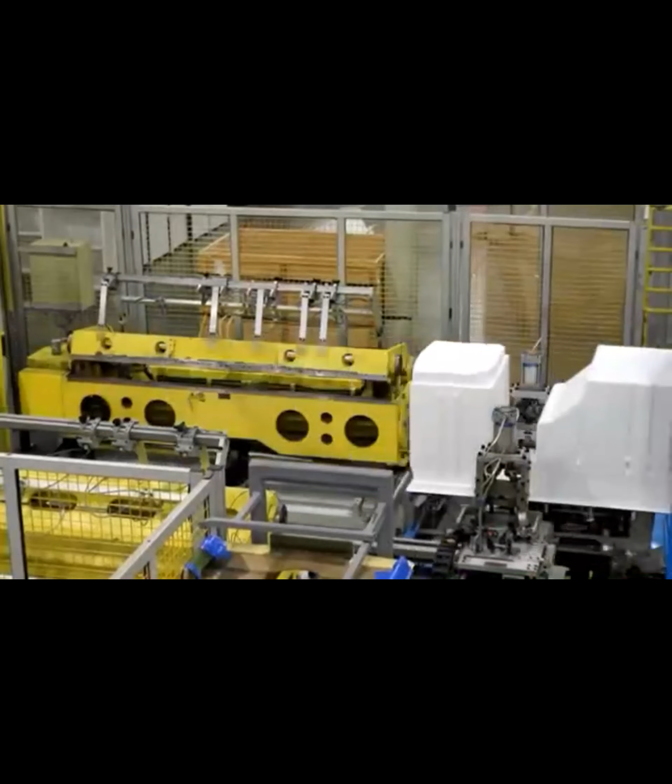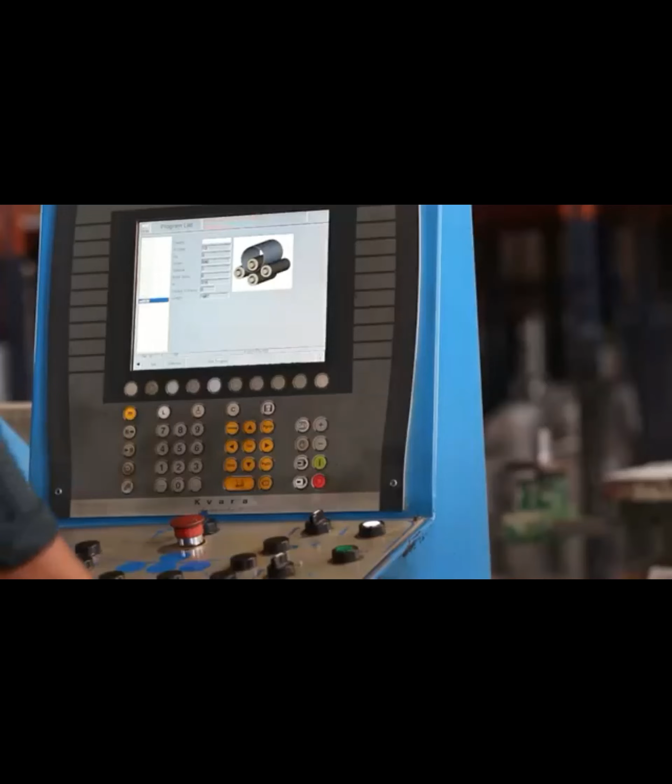ISHRAE disseminates knowledge through its technical committees, which consists of some of the best minds of our industry. It publishes technical books, newsletters, and a prestigious journal, distributing the wealth of knowledge to all its members. Working with government departments, ISHRAE helps formalize industry codes and standards. ISHRAE promotes research by offering financial support to student members to carry out groundbreaking work in technology, systems and processes.

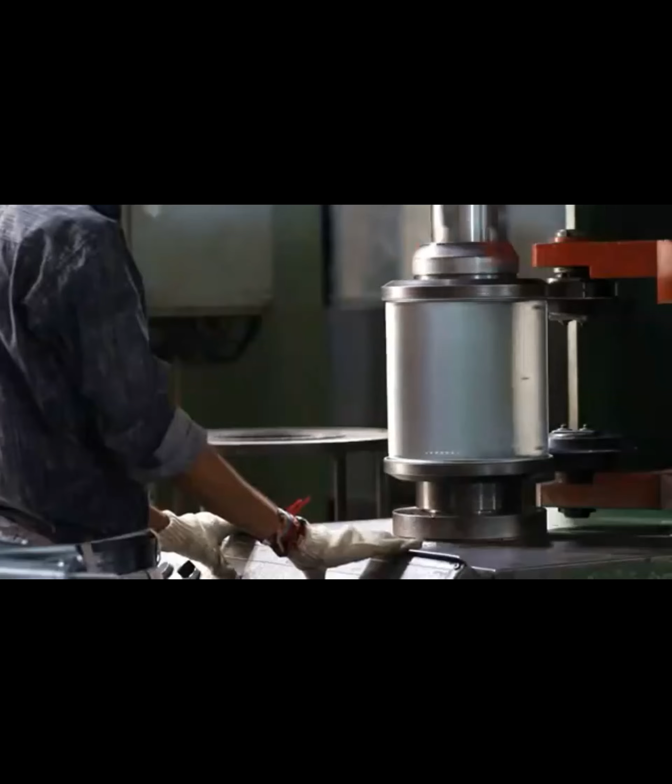Our educational wing, ISHRAE Institute of Excellence, organizes training programs and workshops to help members enhance their skill sets. Our specially designed certification programs under ICP, that is, ISHRAE Certified Professional, empower professionals to always be in step with the prevailing technology. Specially designed courses for technicians are offered to meet the ever-increasing demand for a skilled workforce.

ISHRAE organizes exhibitions, conferences, panel discussions, and product presentations throughout the country. We organize the industry's largest international exposition in South Asia, ACREX India, to showcase cutting-edge technology, innovation, and provide a platform for closer interactions amongst the decision makers in the industry. The ISHRAE exhibition is now growing from an HVAC and R show into BFA, Build Fair Alliance.

This brings together several allied shows connected with the building services industry all at one location. Our chapters organize several other popular events like ISHRAEConf in Delhi, Raycon in Kolkata, Symposia in Mumbai, TechFest in Goa, and many more.

We are committed to provide training and career guidance to our student members through seminars, lectures, quiz contests and site visits. A prestigious quiz competition is organized by ISHRAE to catalyze the transformation of budding engineering professionals.

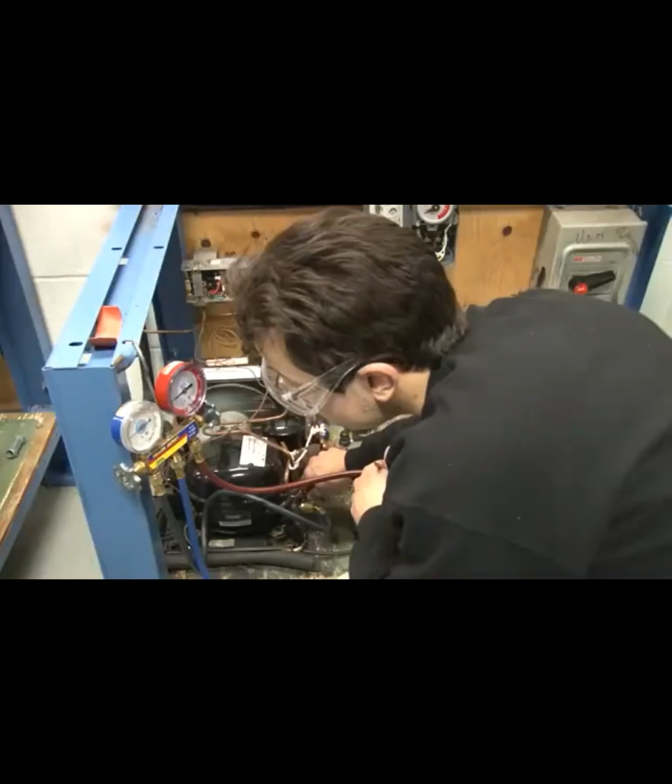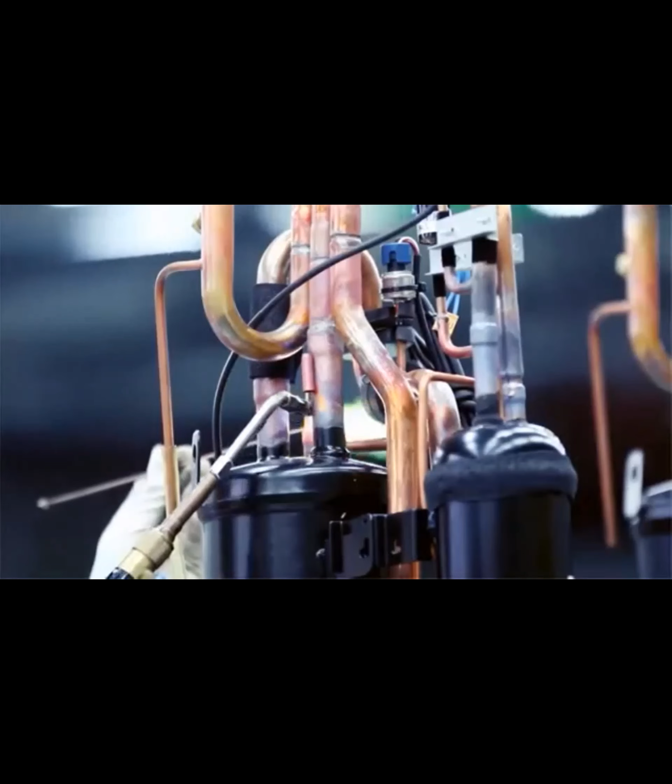ISHRAE provides a platform to potential employers to select student members for careers in the HVAC and R industry at the ISHRAE Job Junction. Young minds are made aware of the need for saving power, clean air and sustainability. The K-12 initiative of ISHRAE focuses attention on school students' development to inculcate a scientific fervor and help develop them into responsible citizens.

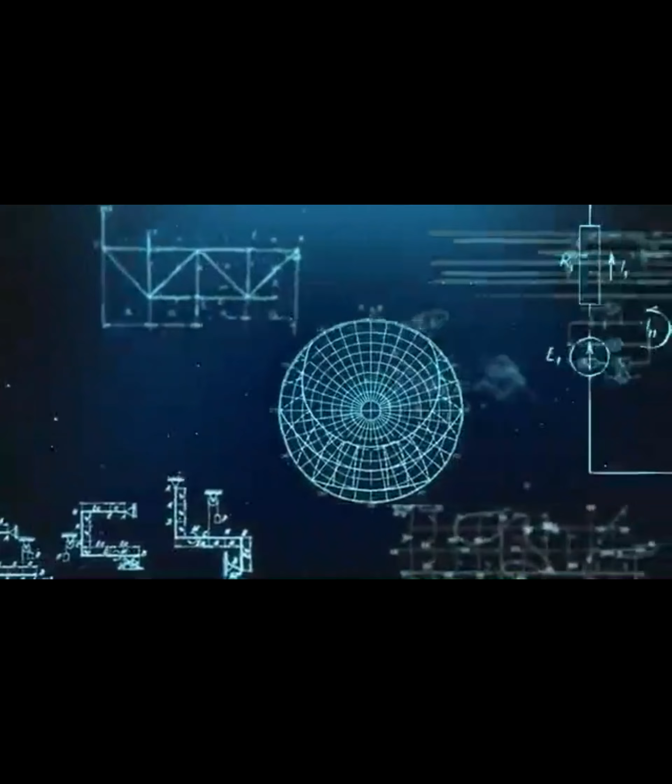Speedy information is imperative to keep moving forward in this hyper-connected digital age. Searcher, a specifically designed search engine, is now available, which allows access to a well-catalogued database on HVACR and building services industry with just a few clicks.

ISHRAE cooperates with various national and international bodies, industry, governments, academia, think tanks to promote the concept of sustainability, environmental protection and energy efficiency and conservation, to enter and explore the universe of the Indian HVACR industry.

Log on to ISHRAE.in that unfolds a panorama of information. Let us engineer a sustainable future together through ISHRAE.

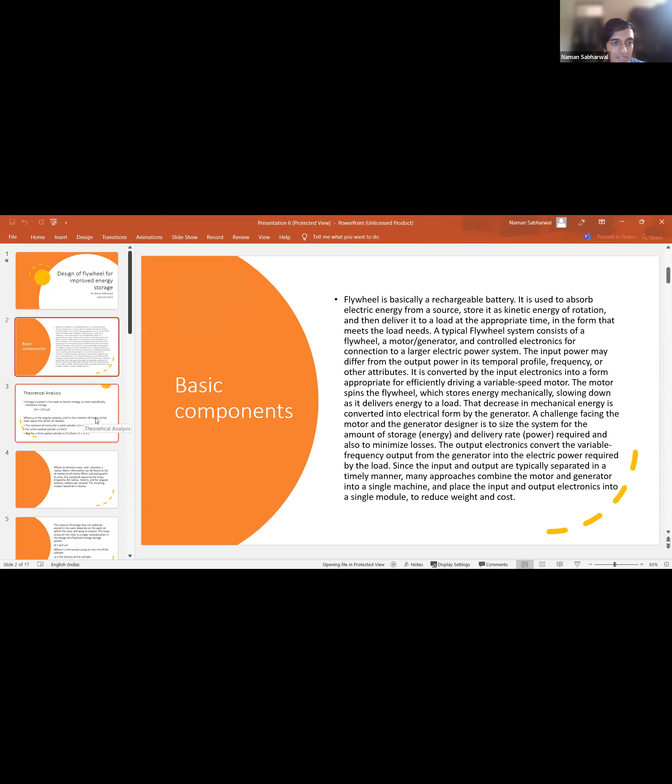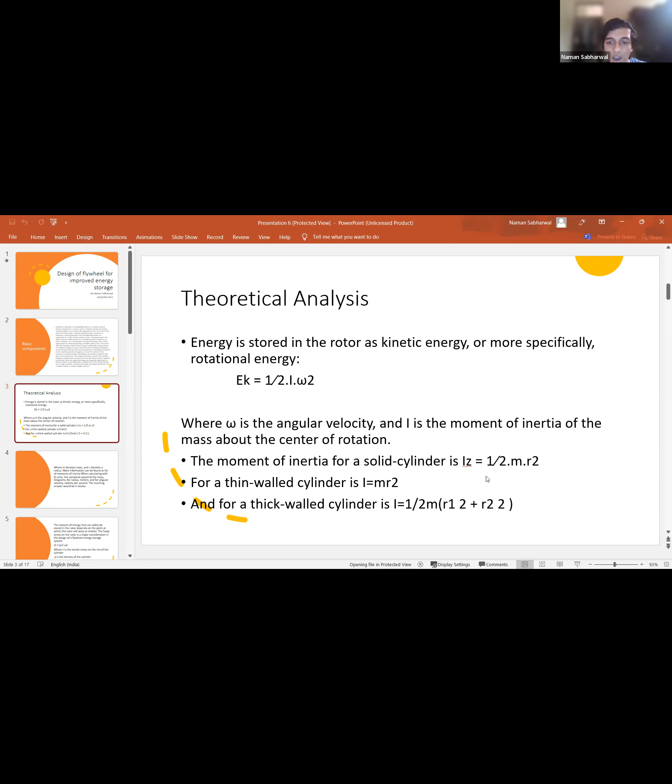So I'll just go to the next slide. This is the theoretical analysis. Basically half I omega square, the energy is stored in the rotor as kinetic energy as half I omega square. So the moment of inertia of a solid cylinder will be half mr square. For a thin walled cylinder it will be mr square. For a thick walled cylinder it will be half m(r1 square plus r2 square). So these are the notations, we don't need to know the notations.

It's very easy. So the amount of energy that can be safely stored in the rotor depends on the point at which the rotor will warp or shatter. The hoop stress on the rotor is a major consideration in the design of a flywheel energy storage system. So sigma T is equal to rho r square omega square, where T is the tensile strength on the rim of the cylinder, rho is the density of the cylinder, r is radius, and omega is the angular velocity of the cylinder.

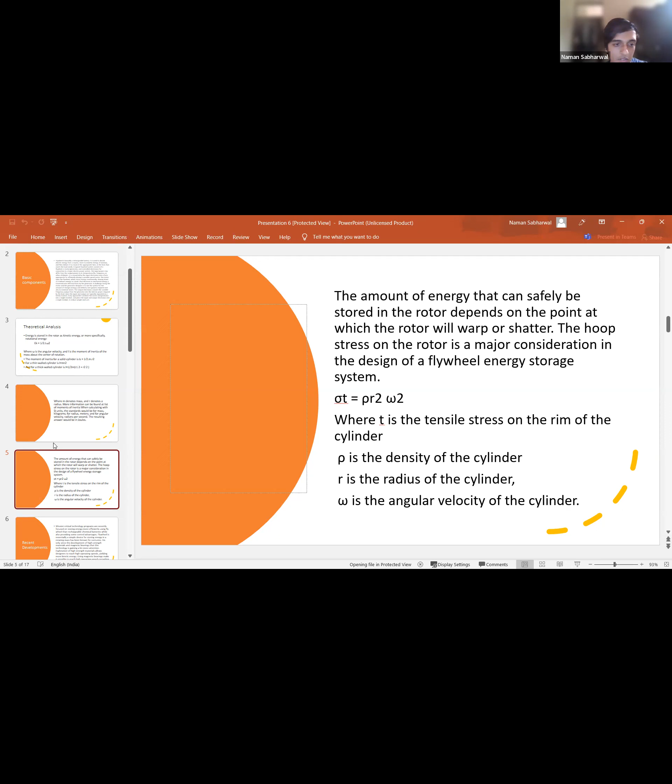So, recent developments: mission critical technology programs are recently focused on storing energy in a more efficient way using flywheels than rechargeable chemical batteries, while also providing some control advantages. The flywheel is essentially a simple device for storing energy in a rotating mass, and has been known for centuries. It's only since the development of high strength materials and magnetic bearings that this technology is gaining a lot more attention.

Exploration of high-strength materials allows designers to reach high operating speeds, yielding more kinetic energy. Using magnetic bearings makes it possible to reach high operating speeds, providing cleaner, faster, and more efficient bearing equipment at extreme temperatures.

Recently designed flywheels could offer orders of magnitude increases in both performance and service life, and in addition, large controlled torques and momentum storage capability for spacecraft, launch vehicles, aircraft power systems, and power supplies. The flywheel system mainly consists of flywheel rotor, motor, generator, magnetic bearings, housing, and power transformation electronic system.

In the development of flywheel, current researchers have focused on increasing the performance while meeting safety considerations, that is, material, housing, and bearing failures. Investigation of energy storage and failure considerations starts with calculation of kinetic energy.

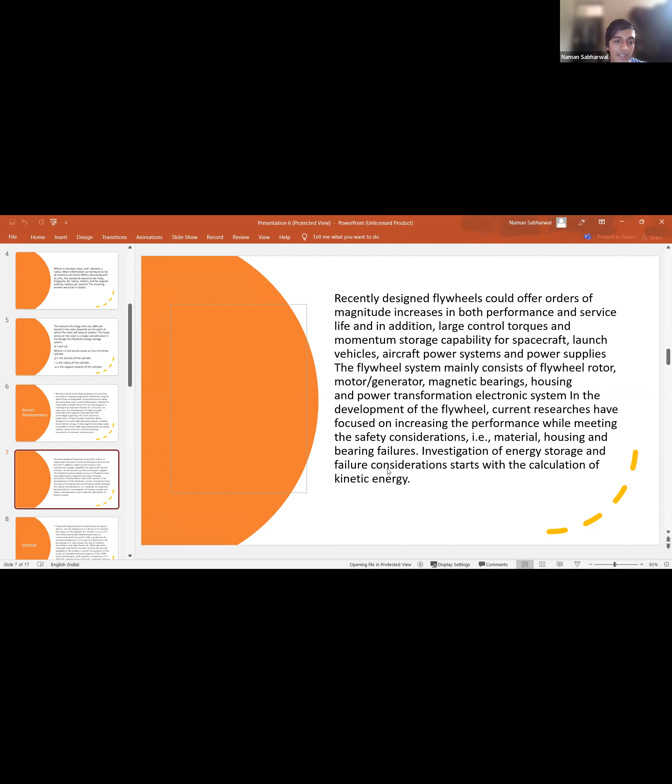So the newly proposed design is as follows. Proposed fully parametric model shown in figure, where t is the thickness, 5.08 centimeters, and the radius of the flywheel is about 14.605 centimeters. Two-dimensional flywheel geometry is constructed with a total of 10 x-coordinates by varying coordinates 1 to 8, only in the A direction, to be less than or equal to H. The T-axis shows the axis of rotation according to the right-hand rule.

Although many materials with better strength and lower density are available in the market to serve the purpose of the study, an example material property of AISI 1006 steel, cold drawn, with modulus of elasticity of 205 gigapascals, density of 7.872 grams per centimeter cube, Poisson ratio of 0.29, and yield stress of 290 megapascals is adopted in all cases.

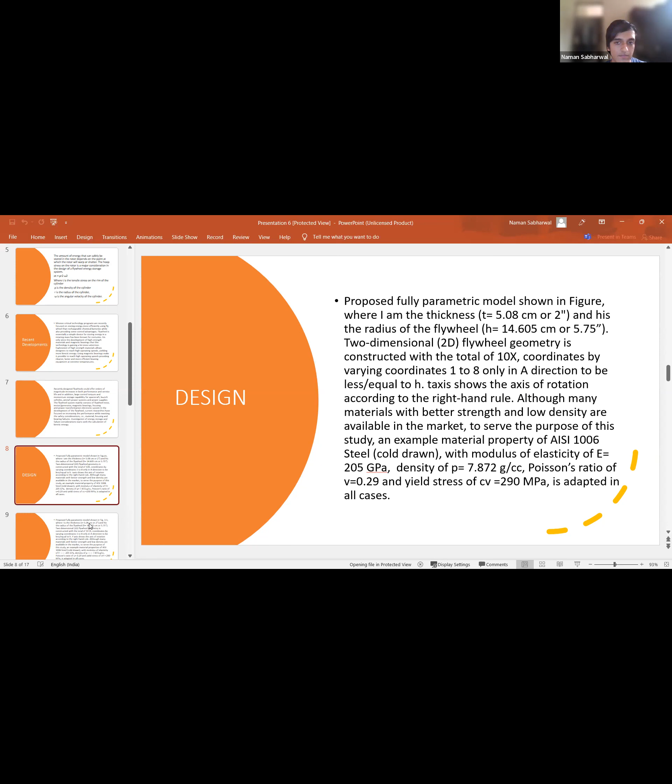This is the model which had been described here. Although there is an infinite number of possibilities for 2D cross-section selection...

The procedure outlined in the previous section was applied to the first solid disk as the base 2D geometry. Next, the annular disk geometry is chosen with an inner radius of 0.1016 meters. In the test runs, using various inner diameter sizes performed worst in terms of high stress levels, even at lower rotational speeds. Therefore, only a single configuration is documented here.

Third and fourth cross sections are chosen out of concave and triangular shaped functions respectively. Final cross section is selected to be a composition of convex lines.

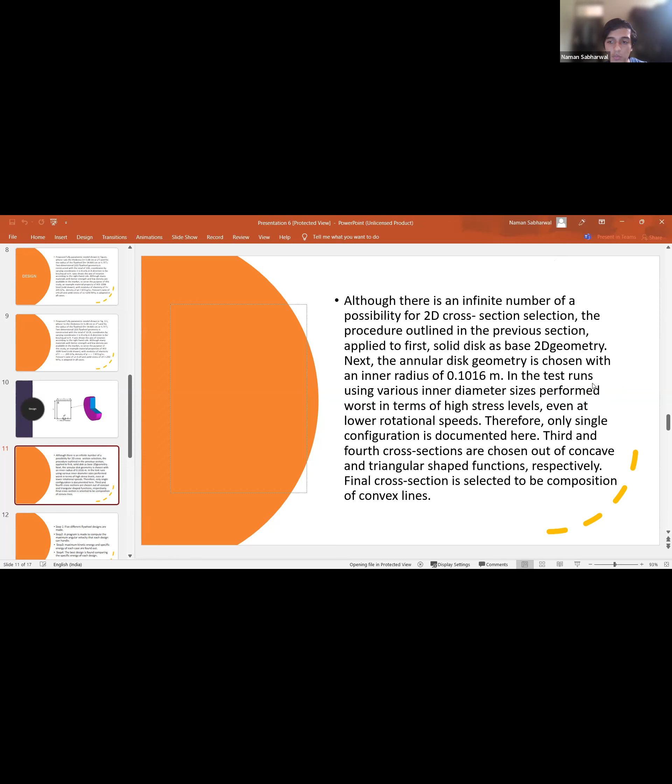So the whole testing process is divided into 4 steps. 5 different flywheel designs are made. A program is made to compute the maximum angular velocity that each design can handle. Step 3, maximum kinetic energy and specific energy of each case are found out. The best design is found by comparing the specific energy of each design. So the design which has the most specific energy is our most efficient design.

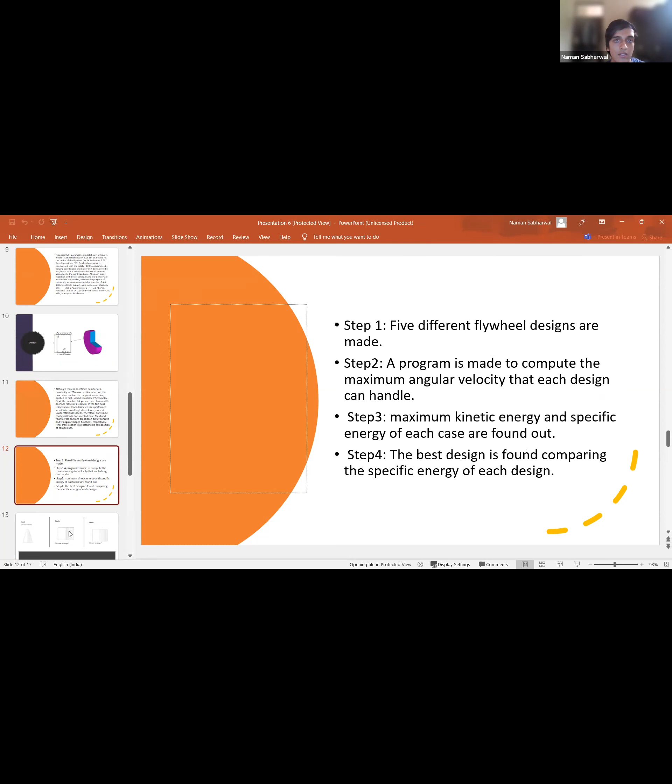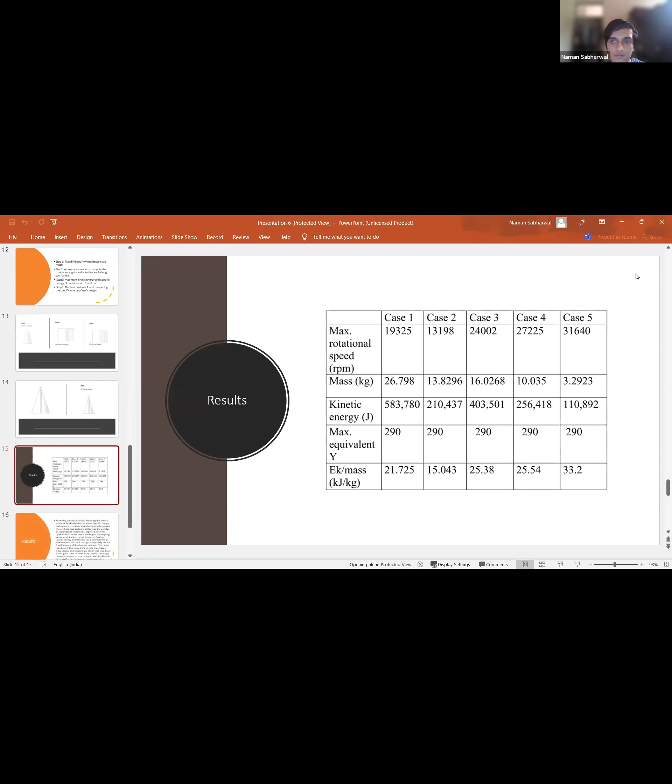Naman, just recalling you, you have only 1 minute left. Yes sir, I'm just finishing.

Last 2 slides. Examining the results shows that using the annular solid disk flywheel yields the lowest specific energy performance no matter what the inner hole radius is chosen. Solid disk performs better than the annular disk, but the highest shaft load is expected since the flywheel mass in this case is the largest.

By adopting simple modifications to geometry, flywheel specific energy performance could be improved as demonstrated in case 3 through 5. Especially in case 5, performance of the flywheel is 50% better than case 1. One more thing to note is that case 5 cross-section also exerts fewer shaft loads than cases 1 through 4, since its mass is the smallest. Although this improvement may be thought small, it could still be crucial for mission critical operations which require long-lasting service life and efficiency.

That's it, sir, I conclude here. Thank you, Naman.

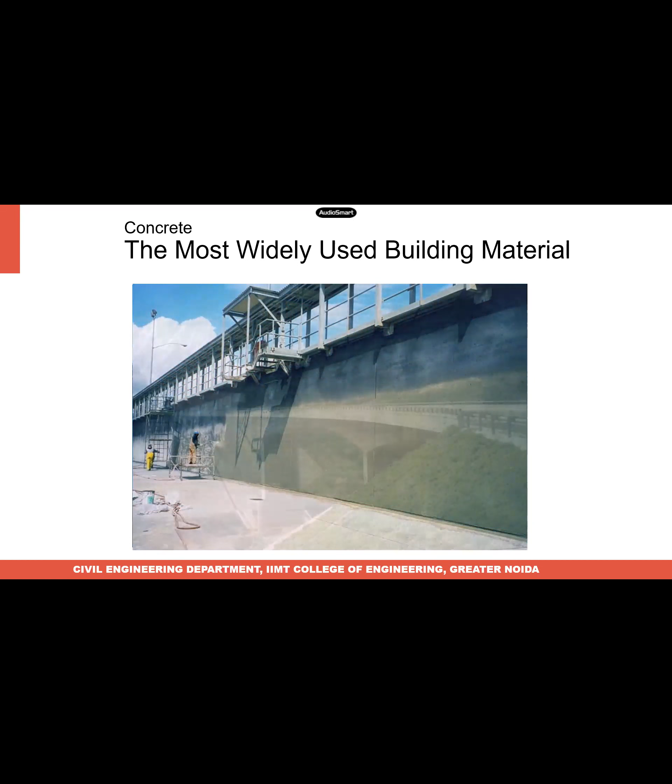Good afternoon, everyone. The subject of my presentation today is concrete durability and its environmental impact. I have four objectives in my presentation. Number one, we will briefly touch upon the overview of porosity and permeability, which impacts concrete durability. We will also see what measures we can take to enhance concrete durability, some performance benchmarks, and the environmental impact of concrete durability. Now, in civil engineering, we all know that concrete is the most widely used material, whether it is water treatment plants, bridges, dams or highways. Nowadays, concrete is most widely used in almost all structures coming around us. Concrete from the outside, although it looks very rock solid and strong, but internally...

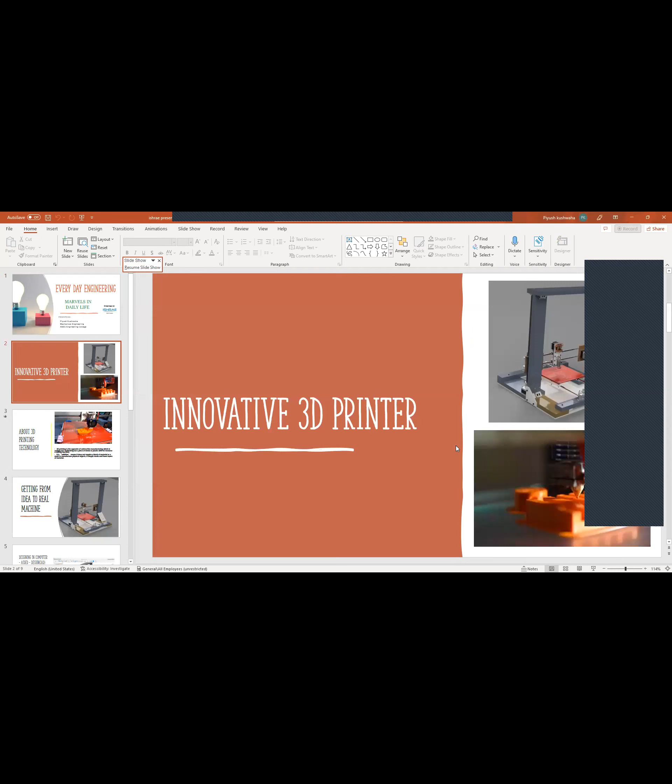Yes, sir. Good morning, all of you. I am Piyush Kushwaha from ABES Engineering College, mechanical department. I am a member of ISHRAE Delhi chapter. My project is about a 3D printer. I made a 3D printer.

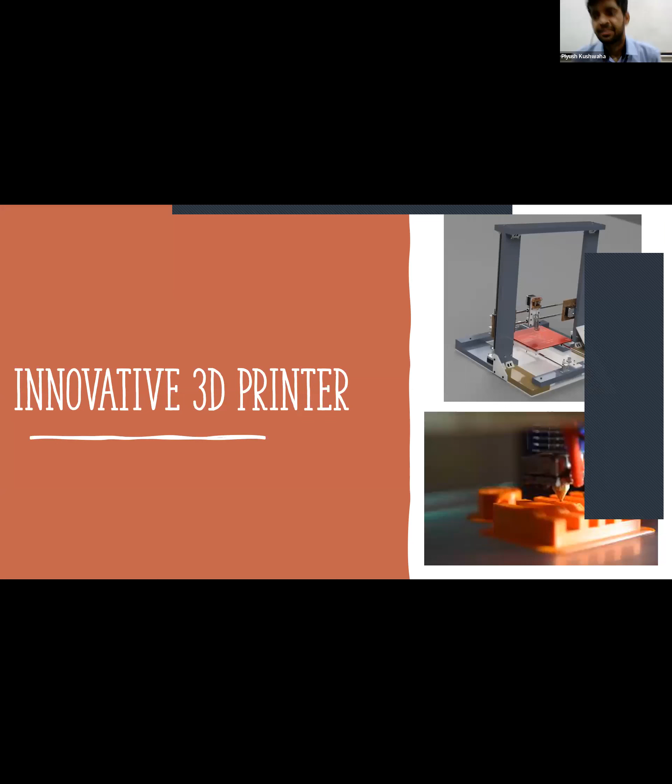A 3D printer is basically a machine that, unlike subtractive manufacturing, builds a part directly rather than starting bigger and machining it down, which requires more material and energy to recycle. 3D printing can be done in plastic or metal, and sometimes ceramics also.

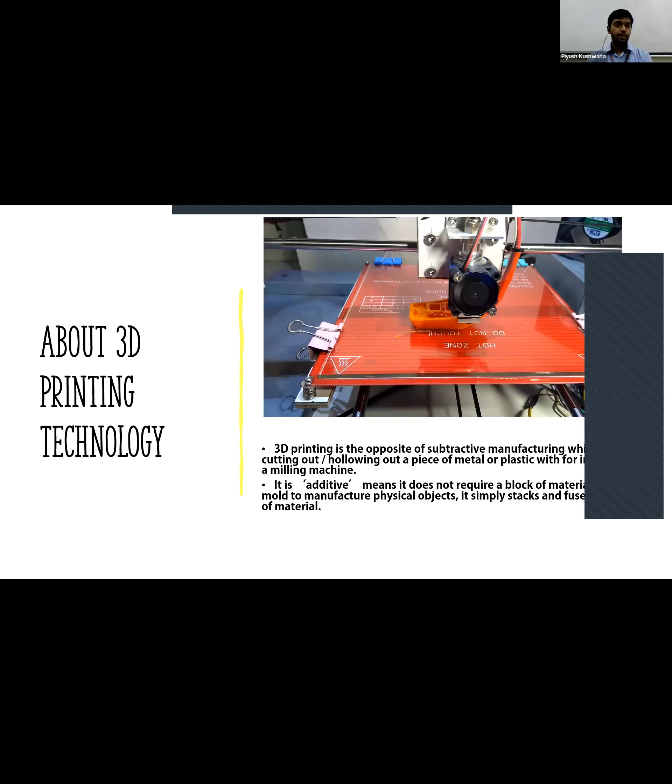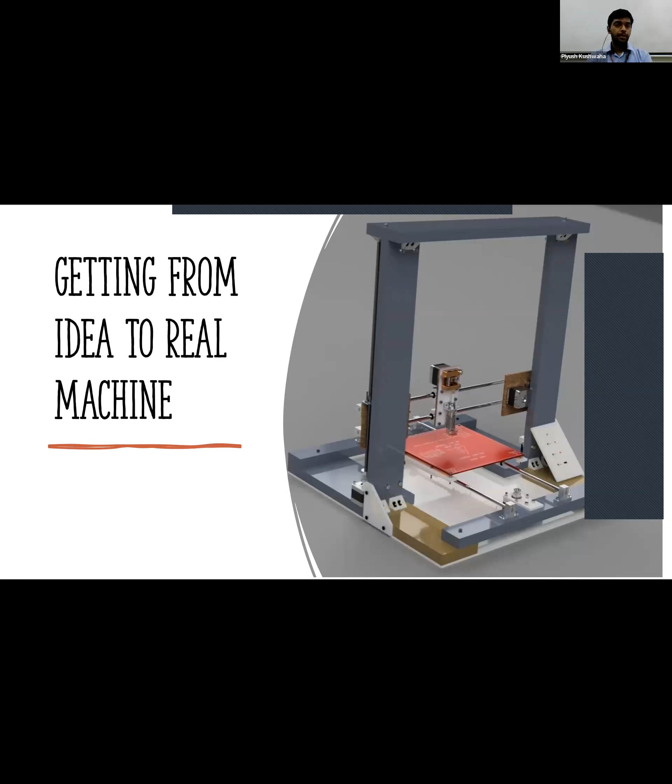So it's additive manufacturing. Here's my journey from idea to my real 3D printing machine. First I started with prototypes, building basically the X and Z axis, then built the whole frame upon that. CAD software helped a lot with analysis and manufacturing, and it improved the accuracy of the process - it's a very nice thing.

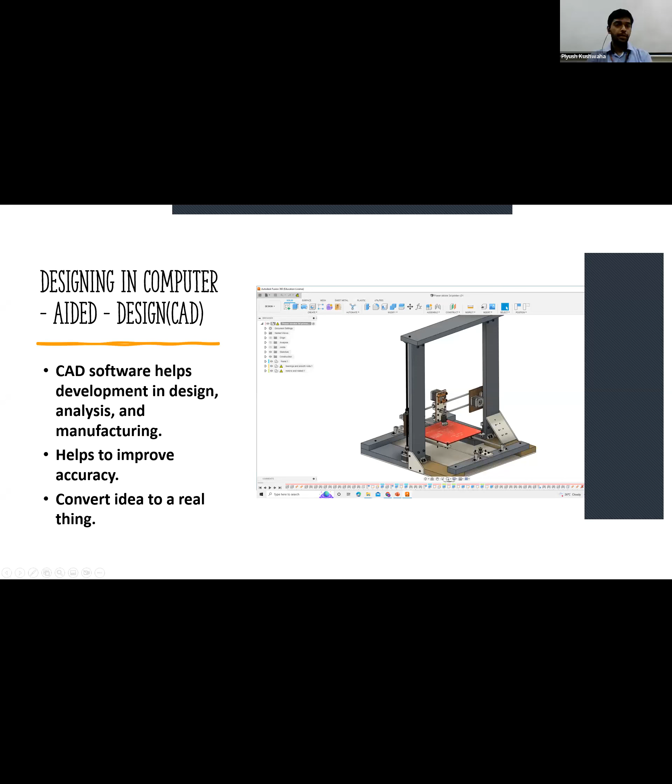It has a huge community, so if we have any problem, somebody in the world from any corner can help us.

After my machine was built, you can see the hot end has a high temperature, around 300 degrees Celsius, 200 degrees Celsius, and it melts the material over time. All these things create a 3D object. No, it's PLA.

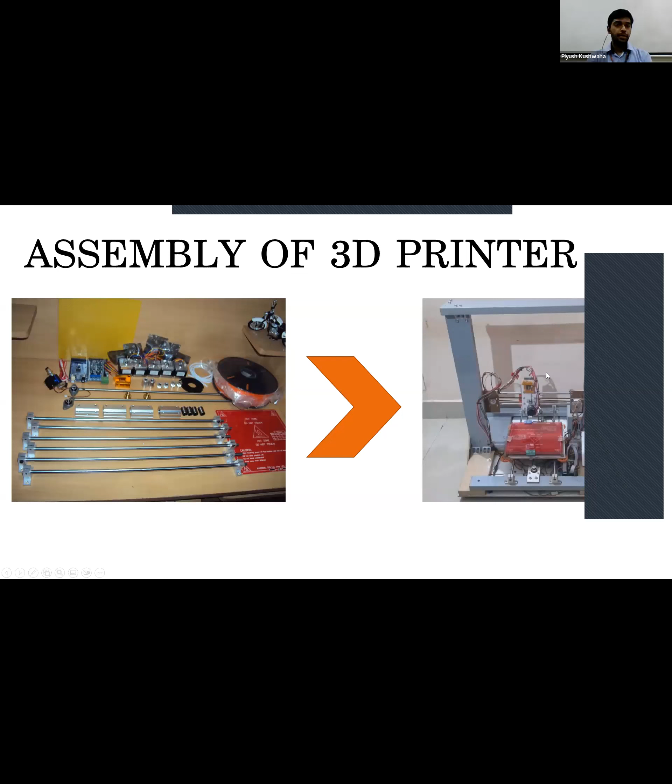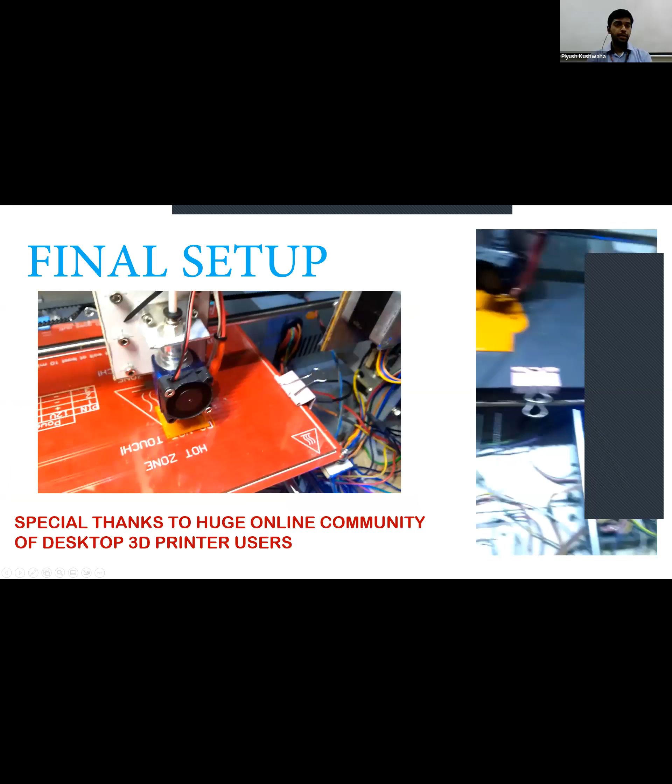Engineering materials are like CF, nylon, a huge variety of filaments. I again thank the huge online community of desktop 3D printing, it helped me a lot.

Now coming to why I like this, 3D printing can turn manufacturing to local, it doesn't have to be far, and it can create very complex shapes also, internal shapes which we can't otherwise achieve.

And 3D printing can make hands. Prosthetic hands are very expensive, and one can't buy those expensive things otherwise.

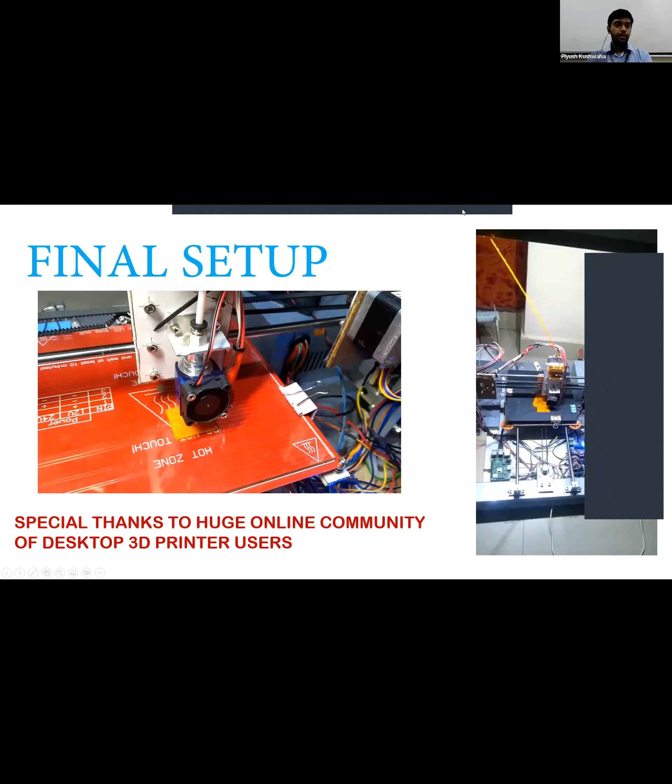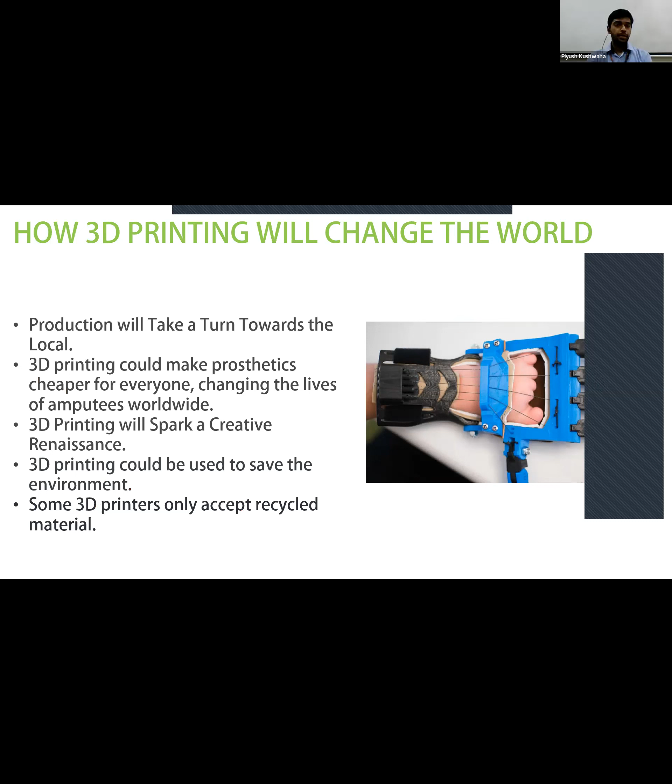3D printing could save the environment, as we see in CNC we create a lot of waste. We accept recycled material, and mainly filament plastics.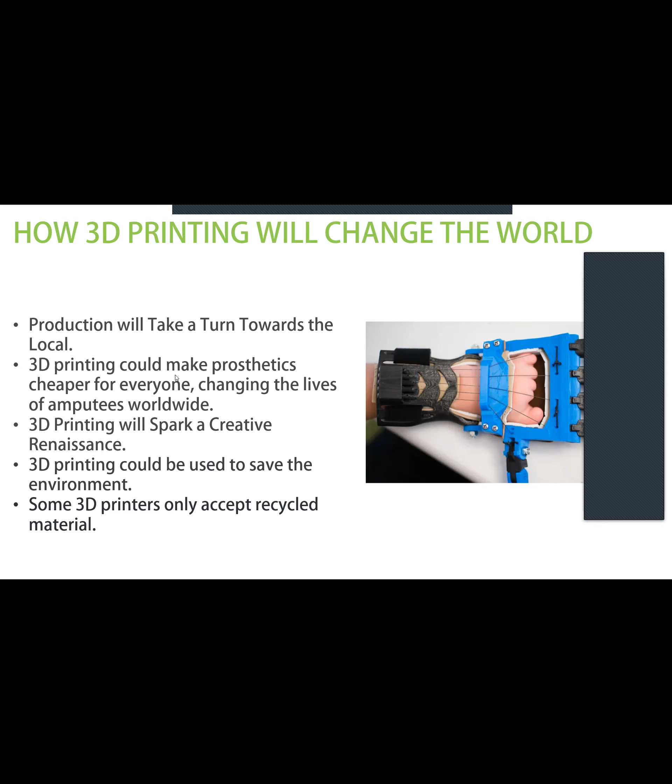The heat exchanger has complex internal shapes, a high fluid pathway and 3D surface features, resulting in high thermal exchange, low weight, and low pressure drop.

We see this in GE Aviation, which has a 3D printed nozzle for a fuel injector, and its weight was reduced by 25%. It's a very huge achievement for me, for us, for the whole world. Thank you, that's all from my side.

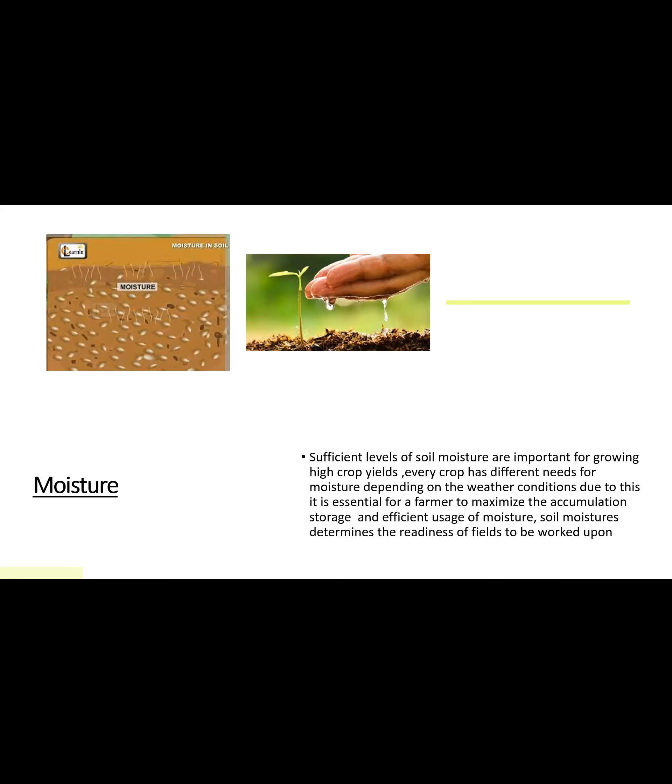In my idea, I use the soil moisture sensor LM393. Arduino works on the principle that all physical activity parameters are converted into signals, like display, buzzers, etc.

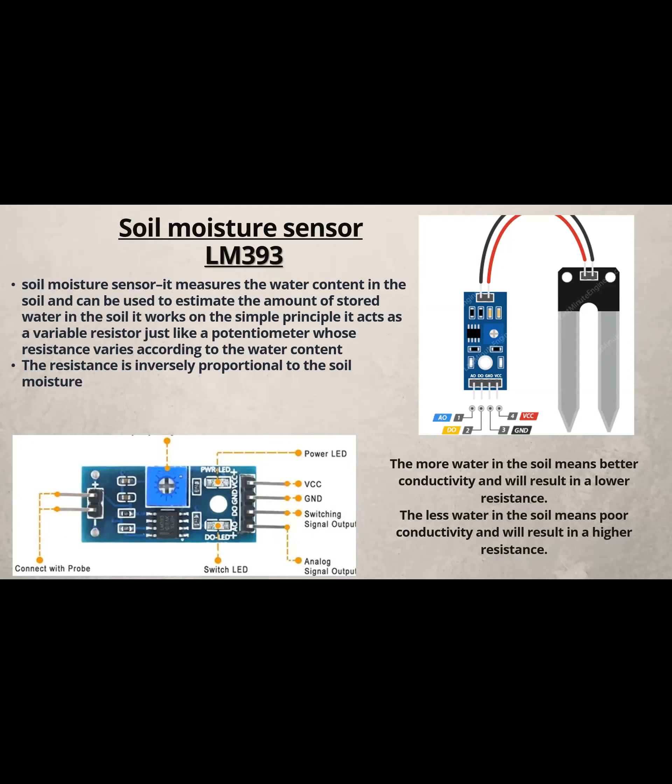This is the probe which is directly inserted into the soil, and this shows the present moisture content available in the soil. This is the LCD for the output signals, which are taken from the Arduino probe sensors.

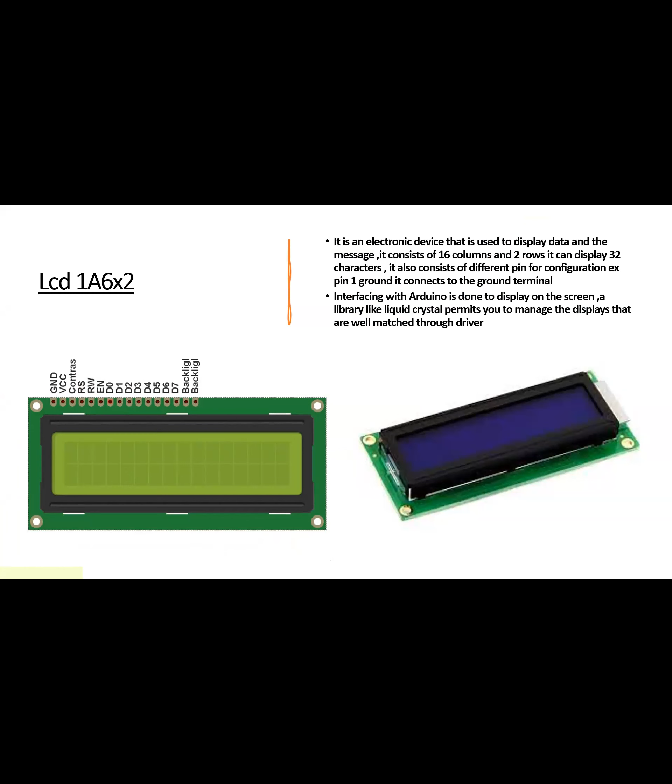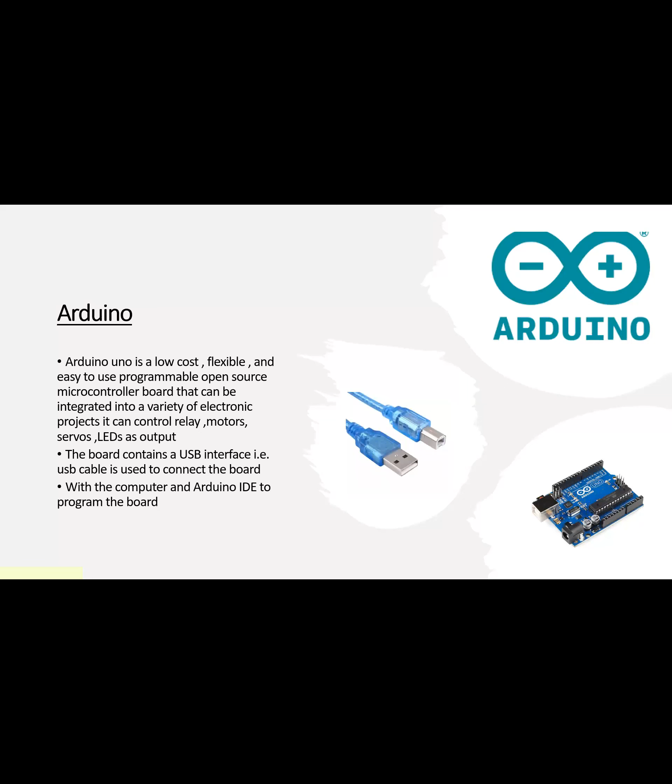Arduino works on the principle of converting all physical activity into digital works, signals, and buzzers through the controlling device of our signals.

This is the circuit diagram of my project. This is the Arduino, LCD, and moisture sensor LM393.

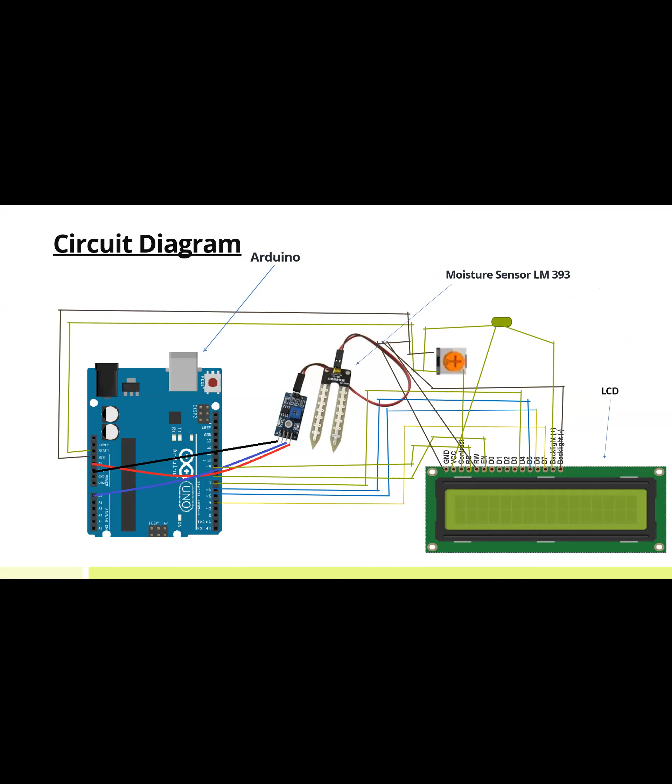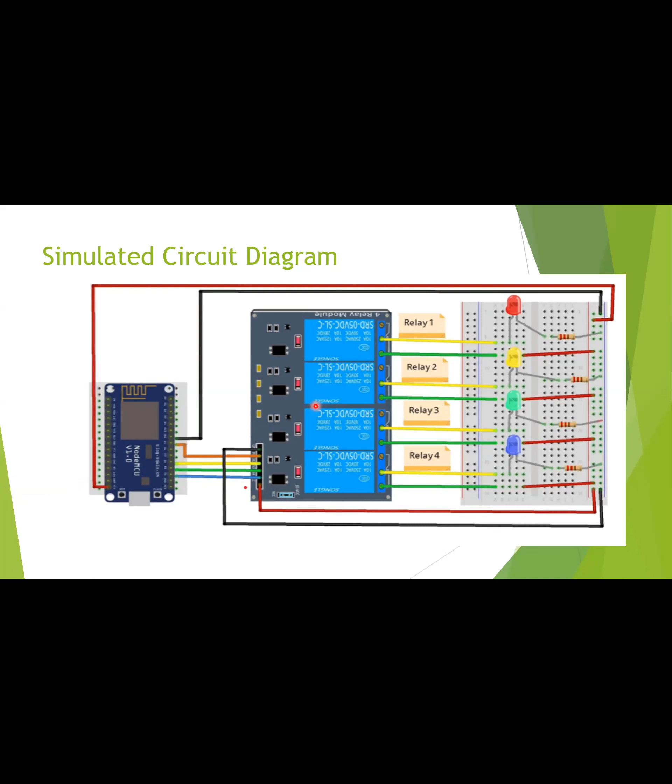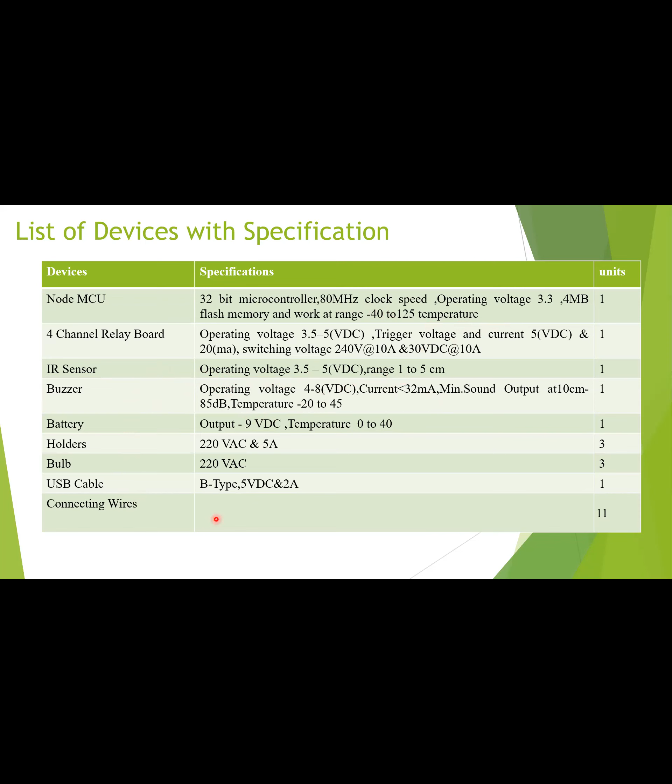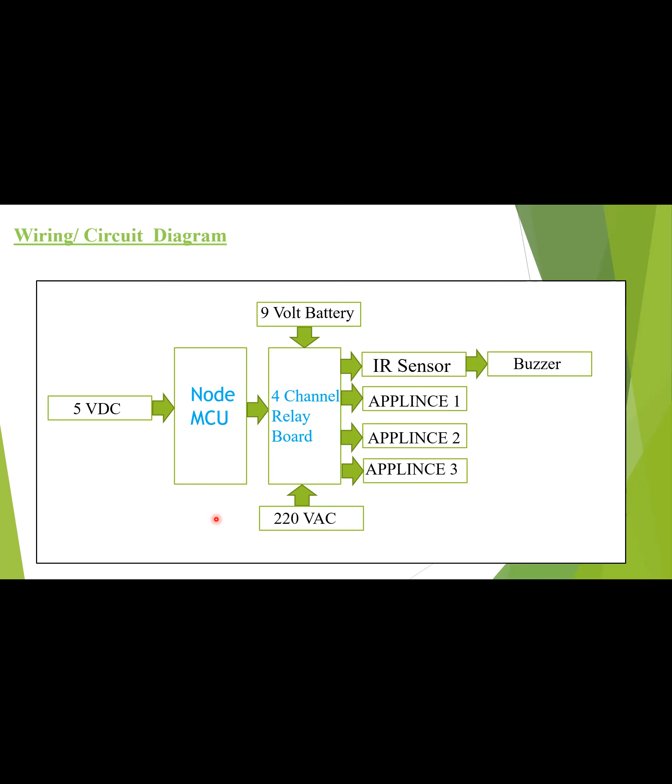This is the code of my project, and this is the circuit diagram again, which shows the flow of power supply from component to component.

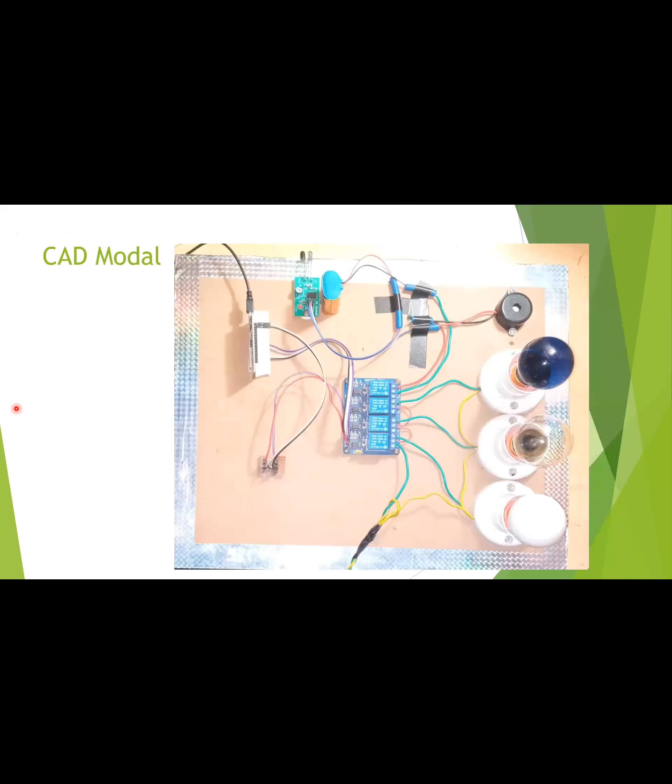This is the CAD model of my project which I made, and now a live demonstration. I am sharing some of the live working of my project, so take a minute.

So basically this is working. The screen appears disconnected. I stopped my presentation and I'm sharing a video instead, from my friend's phone. You may have to switch the account. Can I proceed, sir? Okay, please go ahead.

Okay, thank you sir. So this is basically the working model which I made. But it is not visible. Bring the camera a bit closer. Okay, now it's visible. It's working off this phone's camera now.

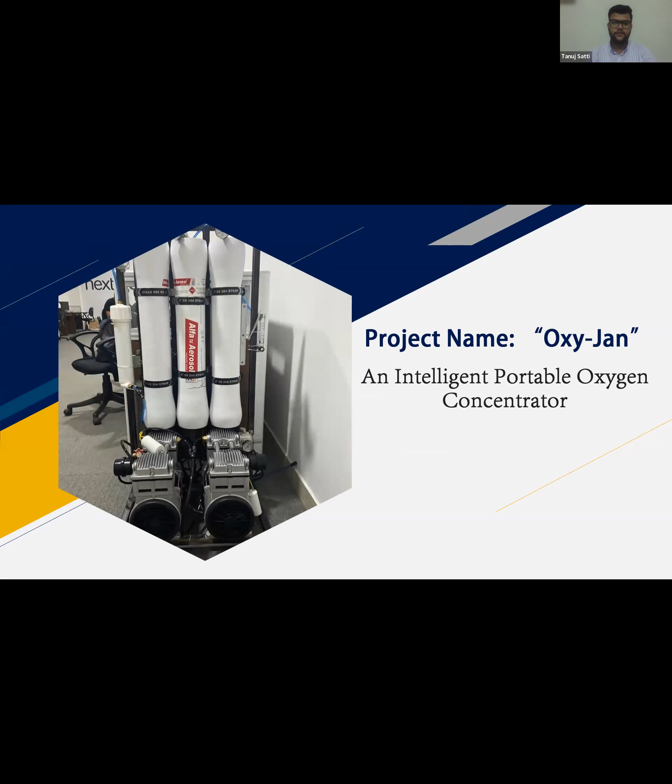So the name of the project that we created in our university is Oxy-Jan. This is the oxygen concentrator that we fabricated in our university itself, and we named it an intelligent portable oxygen concentrator. We made this because we gauged different problem statements.

During the time of the COVID pandemic, we found out that there was a shortage of oxygen concentrators and ventilators. Since oxygen concentrators were only connected to one person at a time, and due to coronavirus infection, if that sort of device got infected, it wasn't used afterwards. Most concentrators also didn't have any feedback loop with their users, and there were lots of external devices for health monitoring software attached to the unit.

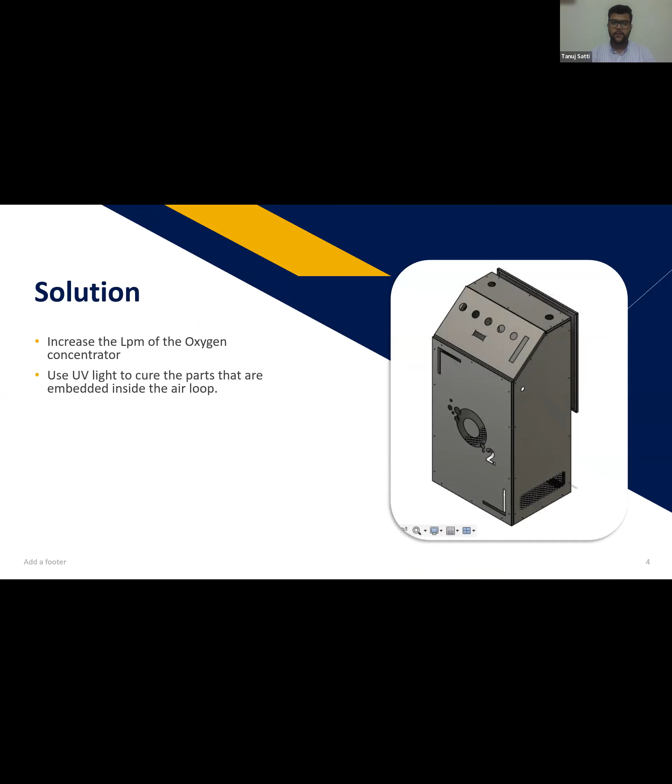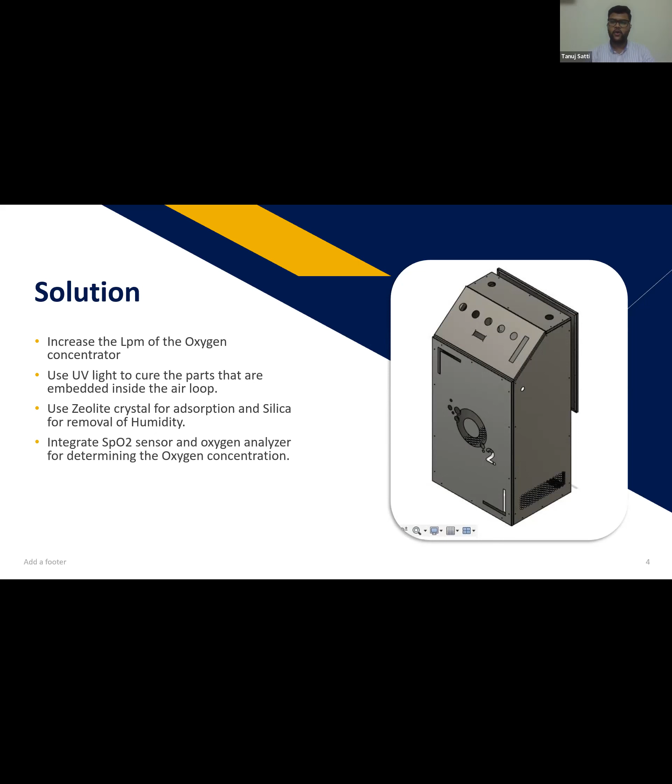So we came up with a solution to increase the liter per minute of the oxygen concentrator, as traditionally concentrators available in the market come with 15 liters per minute; we devised one for 30 liters per minute. We used UV light to cure every part used inside the air loop system, zeolite crystal for adsorption, and silica for removal of humidity, since the oxygen concentrator is based on pressure swing adsorption. We also integrated an SpO2 sensor and oxygen analyzer for determining oxygen concentration, and light indicators for visual information.

As you can see the working of the project now: first, the air gets compressed from these compressors and gets transferred to the cylinders via evaporator. This one cylinder is dedicated for adsorption, this cylinder is also for adsorption, and this cylinder is dedicated for reservoiring or sourcing out the oxygen developed by the two cylinders. This is the dehumidifier container, and this is the FR unit, meaning filter and regulator unit.

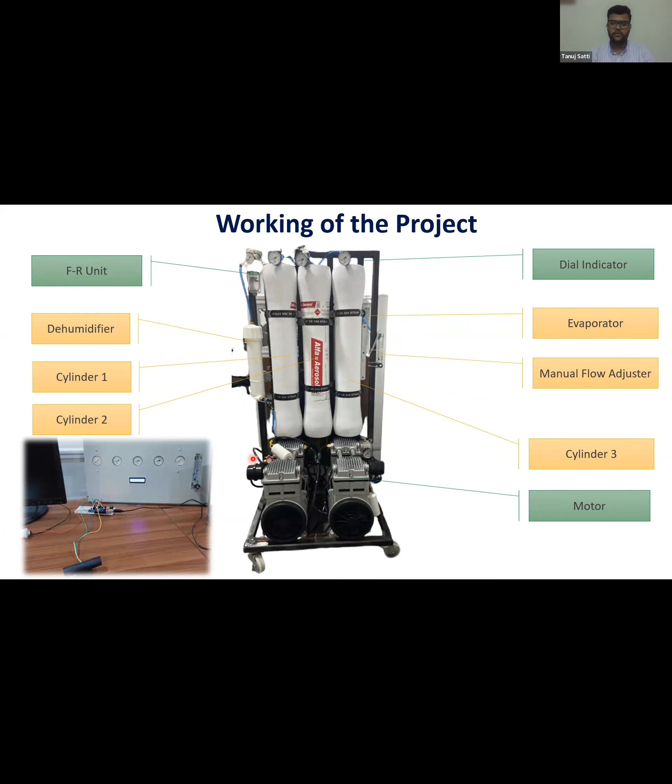Moreover, we have devised an oxygen sensor and a flow rate sensor, which helped us in gauging the flow as well as the concentration of our unit. And this is the video demonstration.

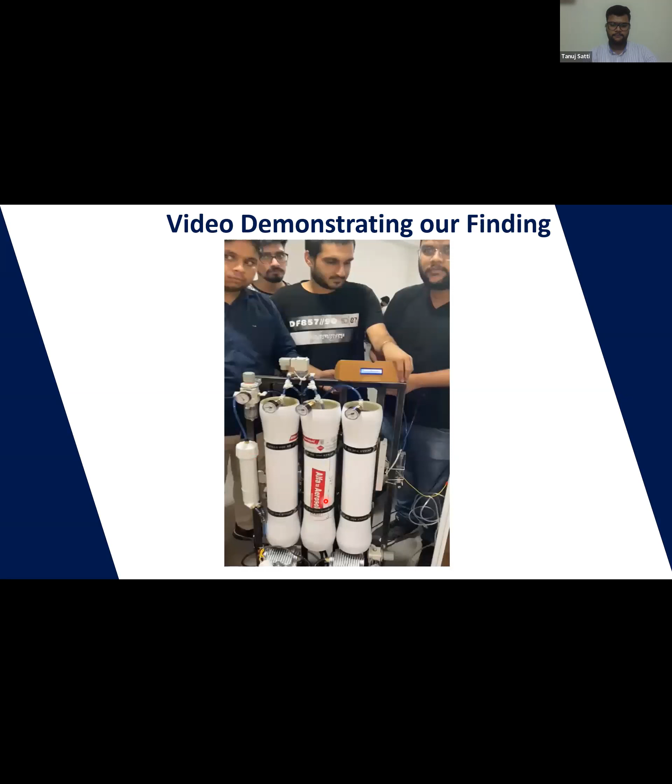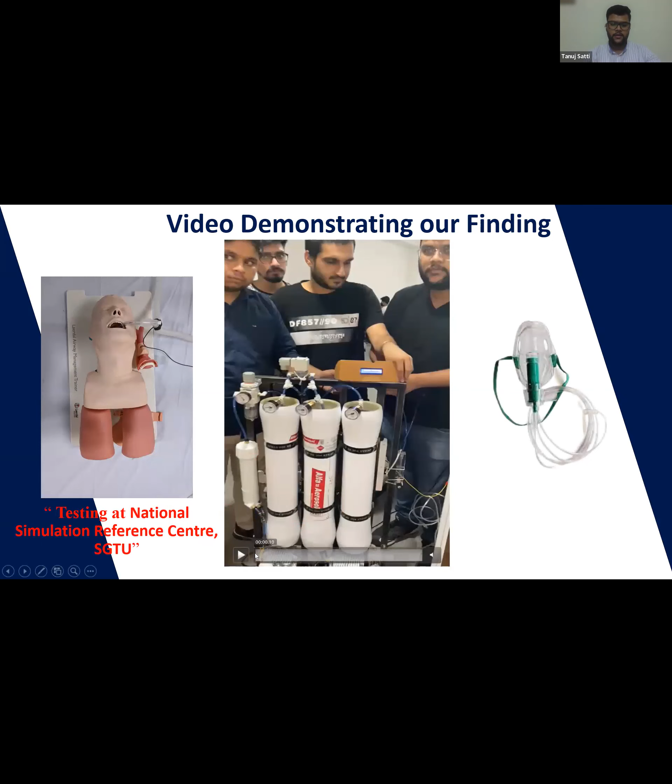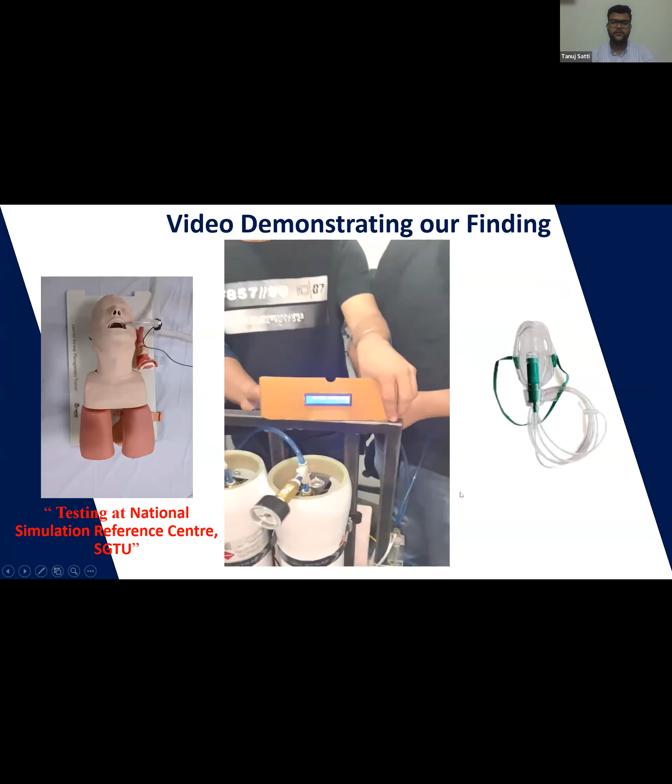This is the testing that we did at our National Simulation Reference Center at SGT University. We found that the oxygen concentration we are getting was 96% at 29 to 30 lpm. So our findings show we managed to get an output of 29 to 30 lpm with readings of 96% O2 concentration.

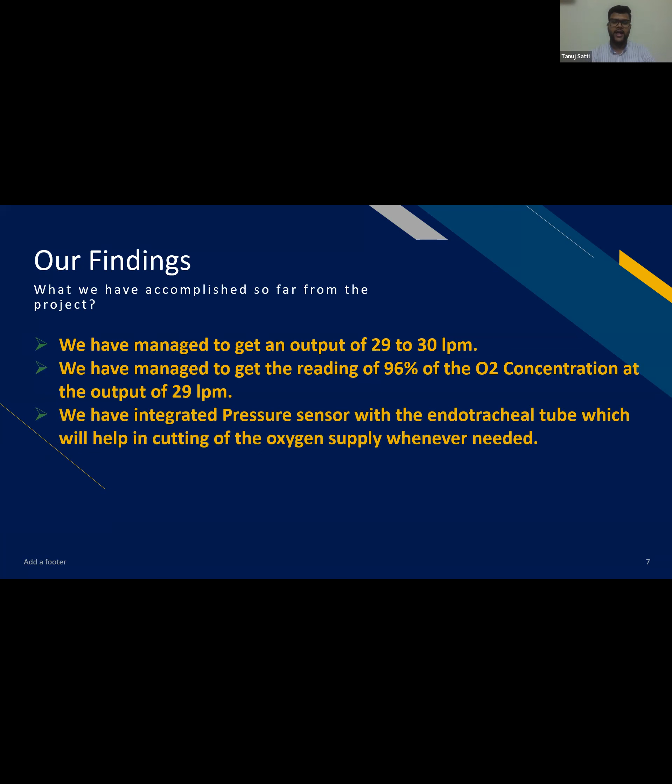We have integrated pressure sensors with the endotracheal tube, which will help in cutting off the oxygen supply whenever needed.

Activities planned further under the ISHRAE student chapter include organizing an industrial visit to industries affiliated with ISHRAE, conducting awareness drives in villages near SGT University to teach them about the benefits and applications of the oxygen concentrator we fabricated, and organizing student development workshops.

So this is it from my side. These are the team members who together made this project a success, under the faculty advisors Mr. Dinesh Deswal sir and Amit Jangir sir. So that's it from my side.

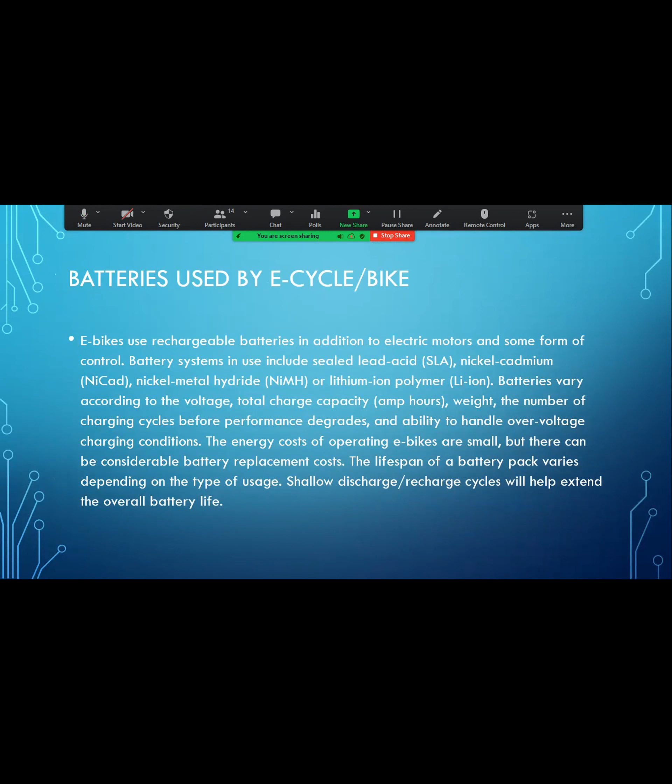You can tell me which slide. I mean, this is slide one only, first one. Sir, it's slide 6th, so you should tell me to move the slide, otherwise it was, I mean, anyway. Is it? Yes, sir. So one slide is over. Tell me, move to the next one.

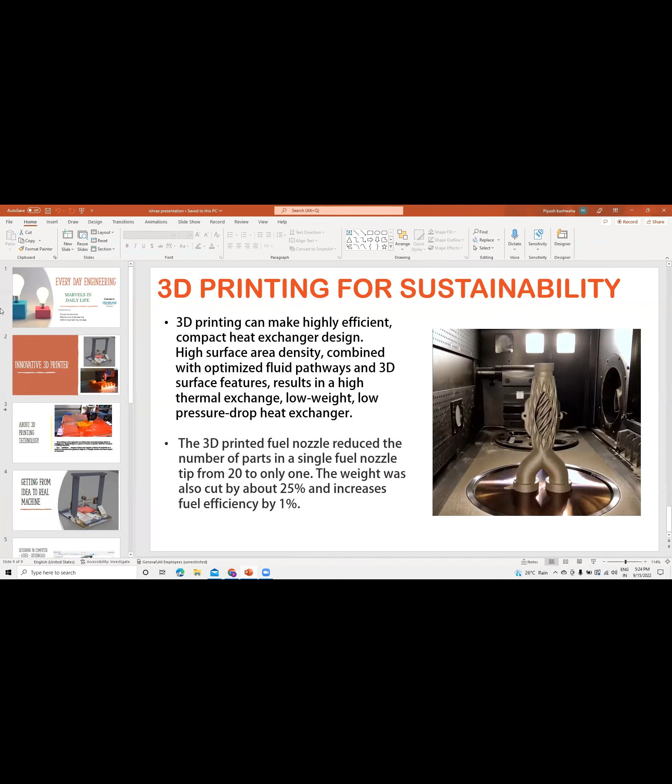Please go to the slideshow mode. Good morning, all. Good afternoon. Yeah, yes, right sir, so it's on. You can use your slideshow, 7 minutes. Yeah, please go ahead. Please start, Piyush.

Yes, sir. Good evening, all. I am Piyush Kushwaha from the Mechanical Department and a member of the ISHRAE ABES chapter. Today I am going to present my project on 3D printer.

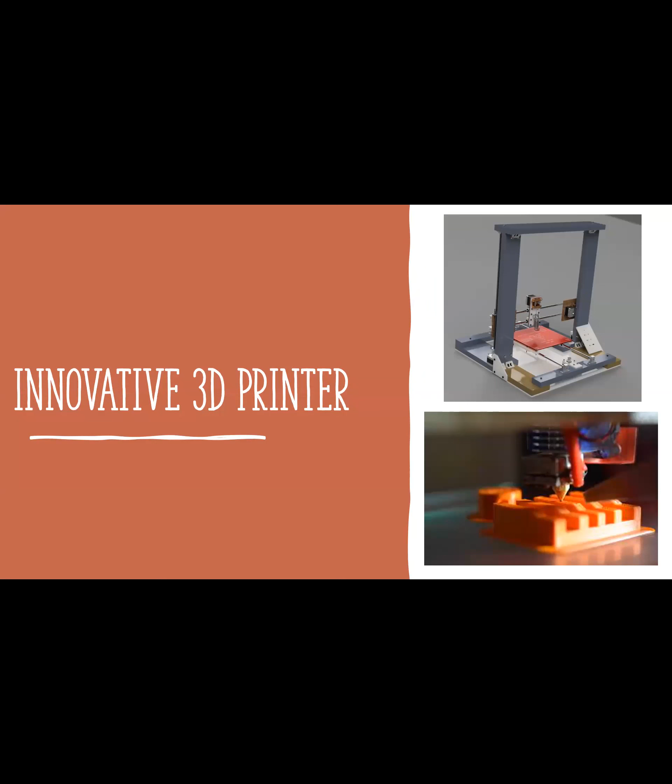So 3D printing is an additive manufacturing technique which makes anything layer by layer. Since 3D printing is an additive manufacturing technique, a 3D printed part will take only that much amount of material which is required to build that part.

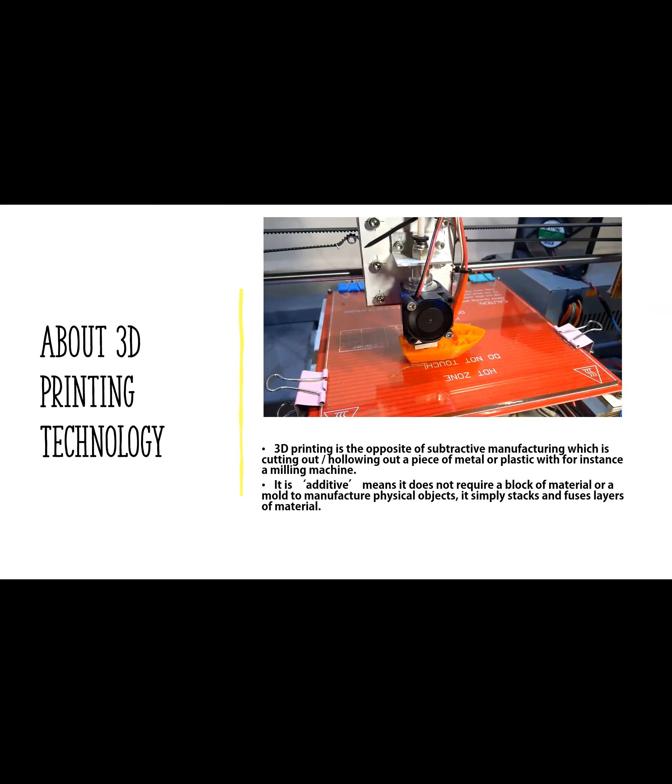Unlike a CNC machine or any conventional milling machine or lathe machine, which needs a block of material bigger than what we need, and we have to use that machine to cut away that block of material until we have the shape and size of our required part. So the cut material just goes to waste. That's not sustainable and is a waste of resources.

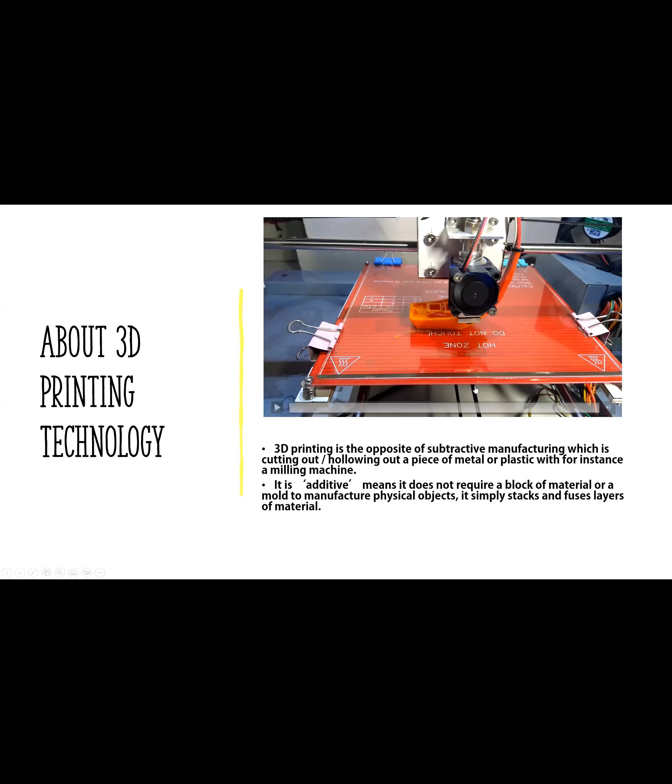On top of that, a 3D printed part can use as much material as needed. You can see here in the video, it is hollow inside, so we can change the setting as per the strength requirement.

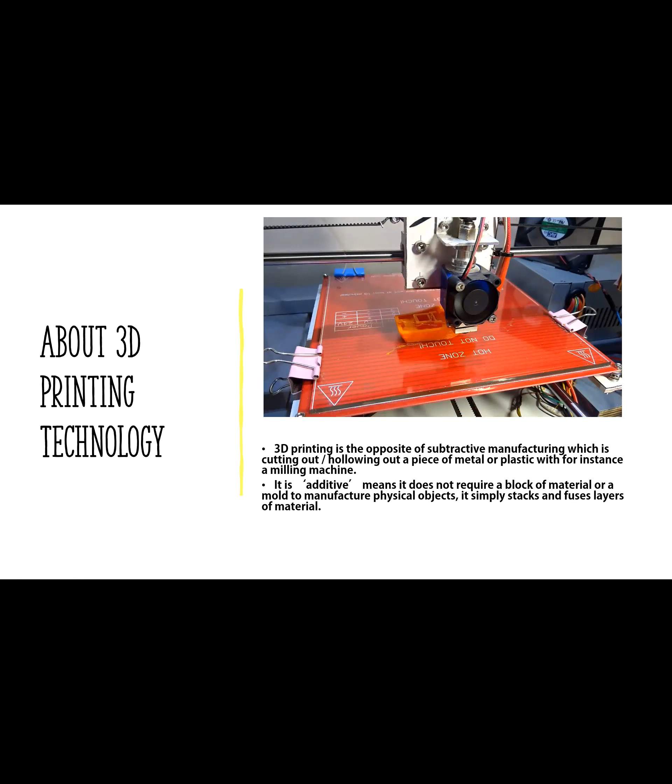CAD software is used to develop design, used in development of design and analysis and manufacturing of these things. It improves our accuracy, and we can tinker with small things and see what we have to build. It's very helpful, but it requires good knowledge of CAD software.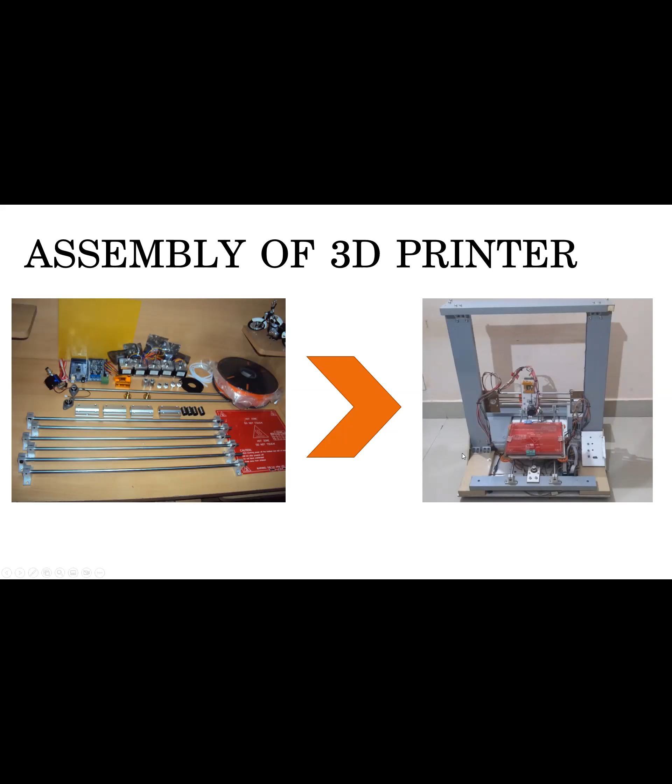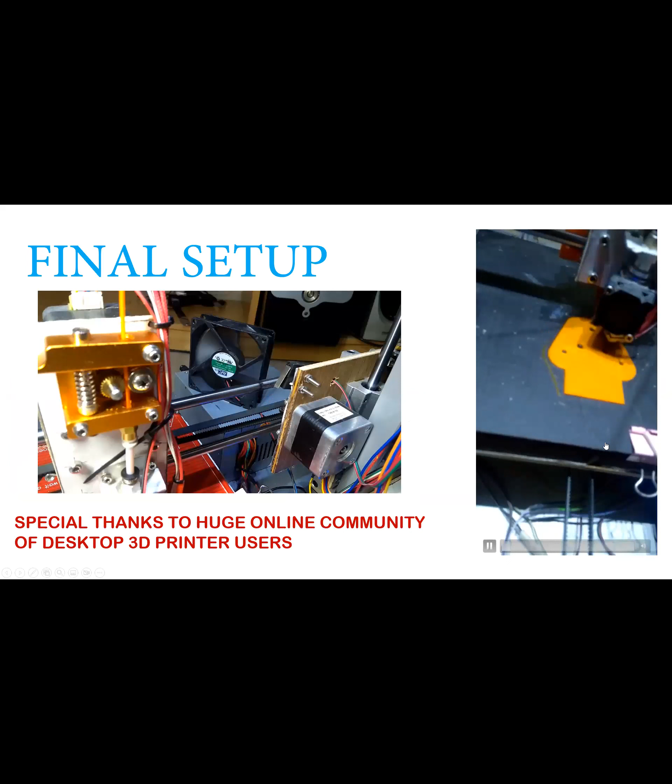In the video, you can see it's building a power switch, and it's a layer by layer process, and it uses a Raspberry Pi with one Z-axis, one X, one Y, and one extruder. As you can see in this video, a filament has been forced into the hot zone of the printer, and it melts, and all three axes are moving simultaneously to build a 3D object.

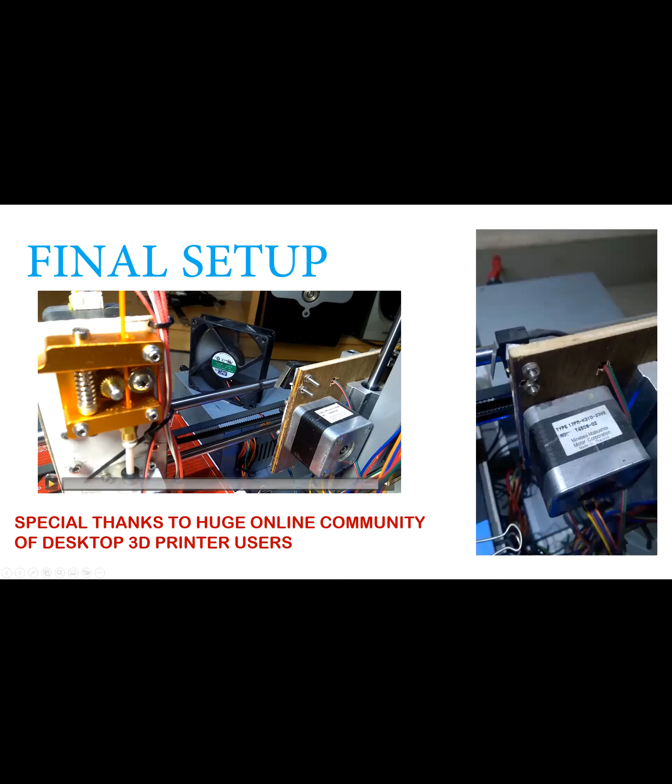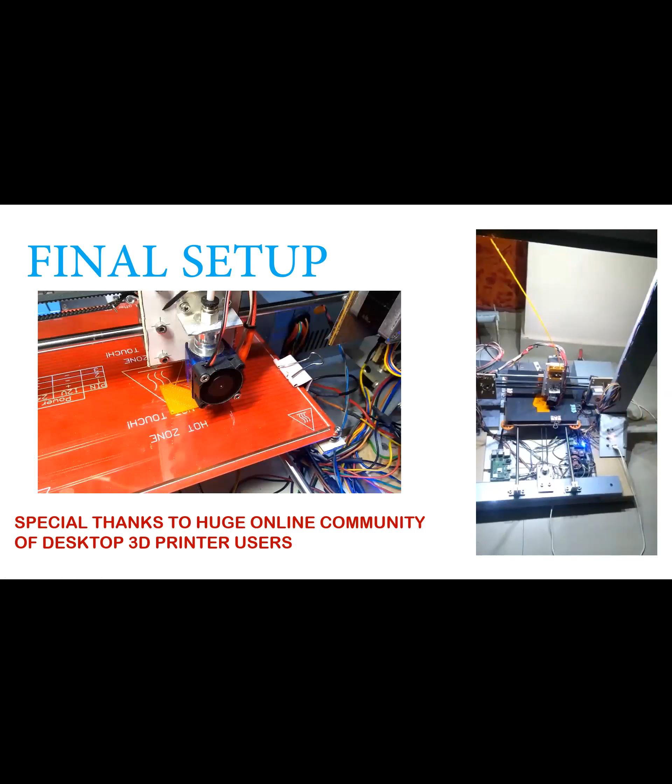Special thanks to the huge online community of desktop 3D printer users, where people all around the world come together and solve each other's problems. I appreciate that. Now, why am I so passionate about 3D printing? It will take production and turn it toward the local level, so the company doesn't have to make products anywhere else and then transport it to where the market is.

3D printers can produce very cheap medical prosthetic hands. The real prosthetic hands available in the market are very expensive these days, and not every person with disabilities can afford to buy a prosthetic hand. So 3D printing can change that and make cheap, working prosthetic hands.

3D printers will save the environment. They use as much material as needed, so no scrap material is formed. Some 3D printers accept only recycled material - we can recycle plastic again and again to make different things. After end of use, we crush that, remelt it, and make another thing.

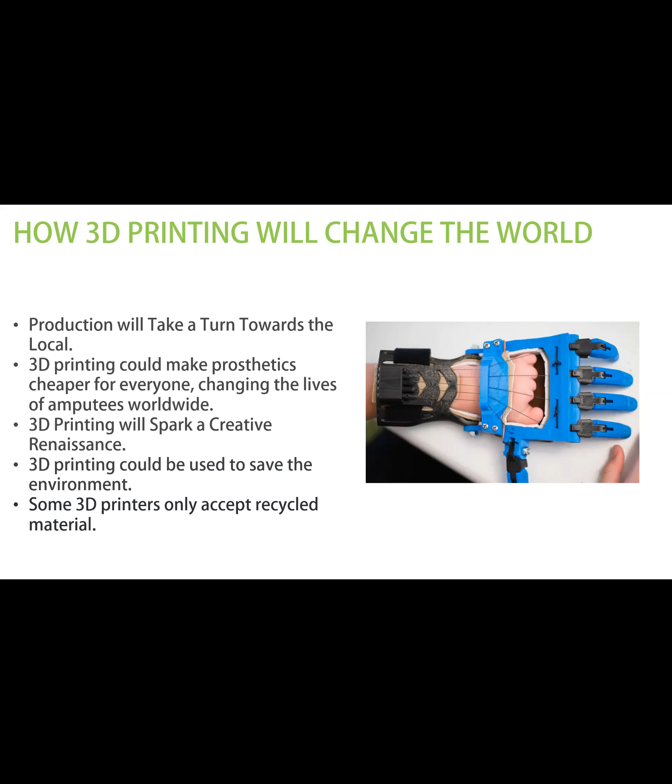Nowadays GE Aviation, a jet engine manufacturer, uses a 3D printed fuel injector which weighs 25% less and increases fuel efficiency by 1%. That's a huge achievement for the world - it reduces emissions. Thank you, that's all from my side.